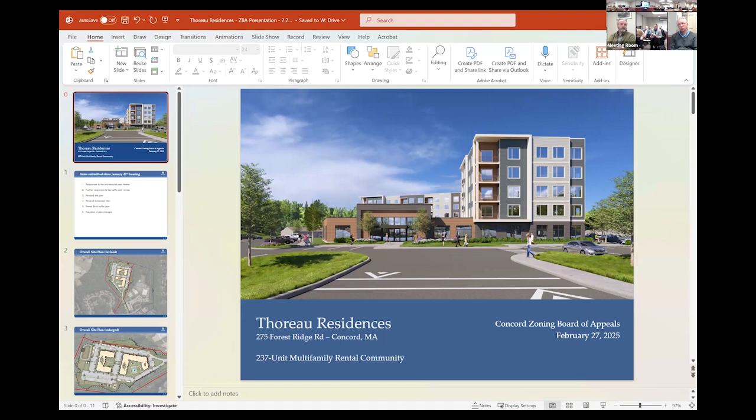All right, so what I'd like to do is start with listing out what we've submitted since the last hearing. Like you said, we were originally scheduled to be here on February 13th. We appreciate the flexibility, so apologize that we weren't able to submit everything by then. So here's what we've submitted and we'll discuss tonight. We've got a number of items.

Number one, we have a response to the architectural peer review that we have submitted in full in writing, as requested by the board. We have had numerous, I guess now 2, responses to the traffic peer review submitted. And then we saw come in today a response to the second response of the traffic peer review. I think that's largely closed out, but we can certainly discuss that.

We have a revised site plan that we're going to walk through. Going out of order, we have a narrative of the site plan changes that we'll walk through in conjunction with that site plan on the screen. And then we have a revised landscape plan that we'll go through in detail, including detailing some buffer zones that we've now included at the end of the entry drive for Sweet Birch Lane.

We have our full cast of characters here tonight: architectural, engineering, and legal, and some folks are actually on the Zoom as well.

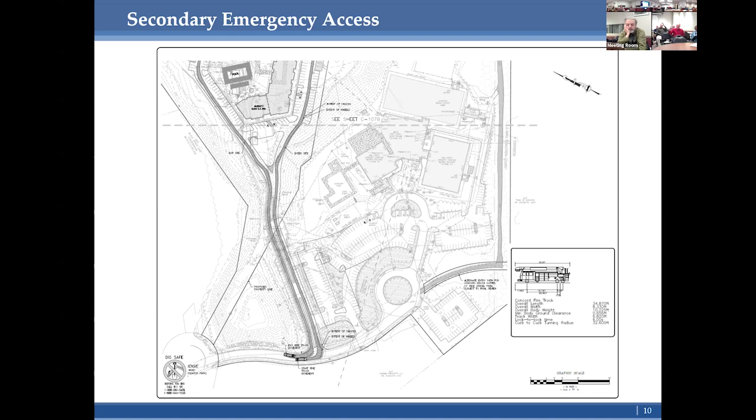Yeah, thank you. And then one more point relative to the proposed, we'll call it basketball court area, but is that going to be illuminated? Is it intended to have nighttime illumination, or have you gotten that far? We haven't gotten that far. I think that we're open to that. Is it a concern? I guess at this point, this is the first time I'm hearing it, I would characterize that as a concern.

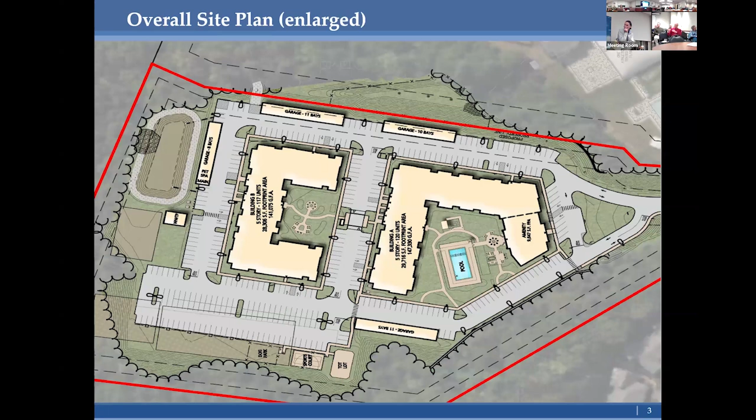And I also wonder whether that playing area might be shifted. I'm not sure of the direction here, whether it's northward. Let's go to the site plan, away from the top playing area, and move both the dog park and the playing court, for lack of a better term, just kind of shifting it in that direction. My reasoning is, yes, basketball courts or pickleball, and I know we've heard the controversy that sometimes surrounds the use of those kinds of playing facilities and the noise associated with them. It seems to me if you shifted it that way, you'd at least move it a somewhat greater distance away from the nearby residences at Black Horse Lane.

May I address that? Yeah, absolutely. Go ahead.

Point very well taken, and I want to give you some backup as to why it's here. The reason it's in this location, as I mentioned to the board, we have the underlying septic system for the treatment plant. So we've kept the sports court and the tot lot off those fields because of the embedment depths necessary for the asphalt surface, or if we embed a post for the basketball court, or any elements for the playground. The dog park is a fence, so we can work around the field. The other elements would intrude upon the wastewater leaching fields, which is why the order and position are as you see it. It's driven by the balance between respect to the abutters and the underlying infrastructure that needs to go in.

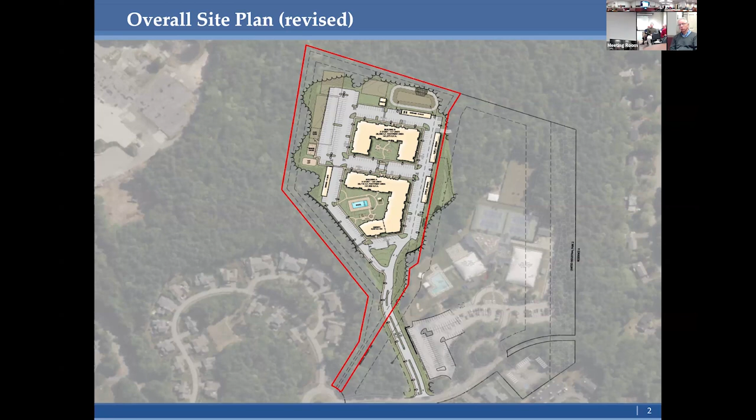Good evening, board. Tom Minor, Park Design, landscape architect. We did the landscape design for this project. I'll briefly go over the changes and revisions we've made to the landscape plan based on the site plan revisions and peer review comments.

This is slide 4, Jim. That's the two buildings, northern part of the site. I'll be repeating some of Phil's comments, but to begin with, in response to the peer review, to get more central amenity facilities, we've taken the dog park and the tot lot from this area and moved it down here, added the sport court as Phil mentioned. The tot lot is a larger expanded area for two different age groups, and the sport court will provide amenity space for older youths and adults.

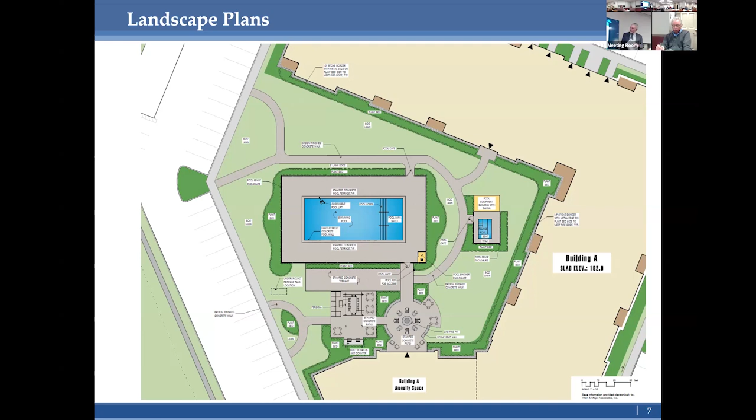This amenity area hasn't changed at all. It's more of a passive use. You have the propane tank area right here. This is our raised table crosswalk with a bus stop. This will be landscaped. We'll have some shrub masses around the building and around each seating area, fire pit, grills, seating area.

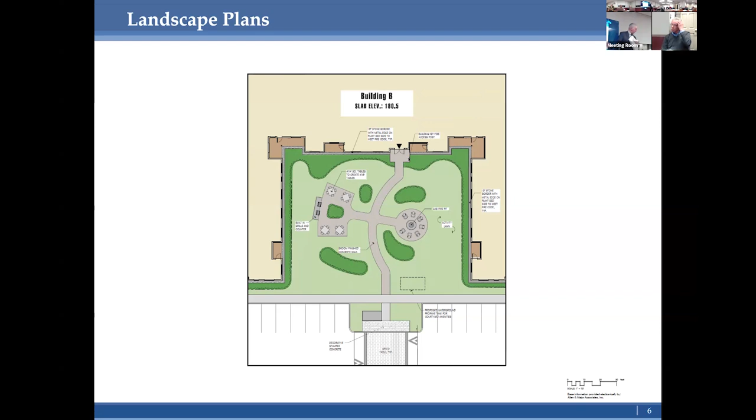And those will provide separation from the use areas and the patio. Some of these will probably move. I can see this one moving right here, actually. And this will probably switch around here as we get into the final design. If you want to go back to this, the tot lot, I forgot to.

This is the blow up of the tot lot, the sport court and the dog park. It is an ADA accessible path to connect all three, and we're not showing anything in these areas now. There'll probably be something there, but there won't be anything large to obstruct any view lines. This will be a much safer access path to the amenities than we had before up at the top of the site.

That's anything else, Jim, that I missed? I think so. Any questions?

Sure, I had this question before. I can see the path from the tot lot from the first building, but not from the second. Would a child coming across, where would they cross to get to that gray crosswalk that you're showing?

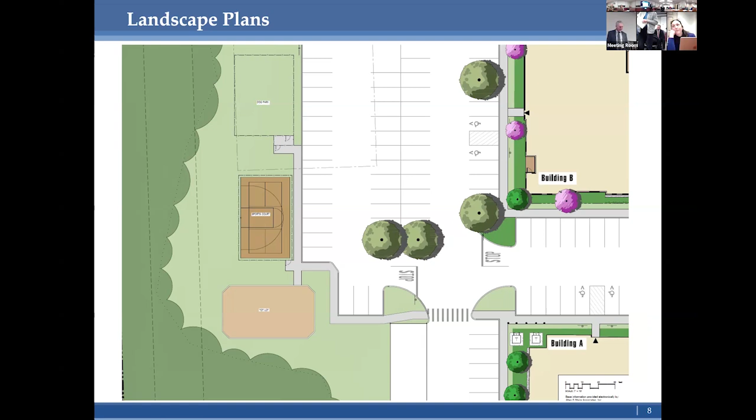Good question. May I? Yep. It's not shown on this plan, that raised speed table. So the intent is they go across the raised speed table.

Right, because the idea was to bring people through this center connectivity. So if you are coming from building B, you would come across the speed table, along the building, and then you would go along the sidewalk in front of building B to cross and then go to the amenities.

That makes sense. The idea, because we heard that feedback early on about making sure these buildings were connected through, that residents in building B felt like they were connected, not only through the passive courtyard, but the ability to connect through to get to the active courtyard. So it made sense for all of those pedestrians, including the children, to follow that same path and then branch to go to the amenities.

That makes sense. And then along those same lines, will the tot lot be fenced or not? We usually fence them. Yeah.

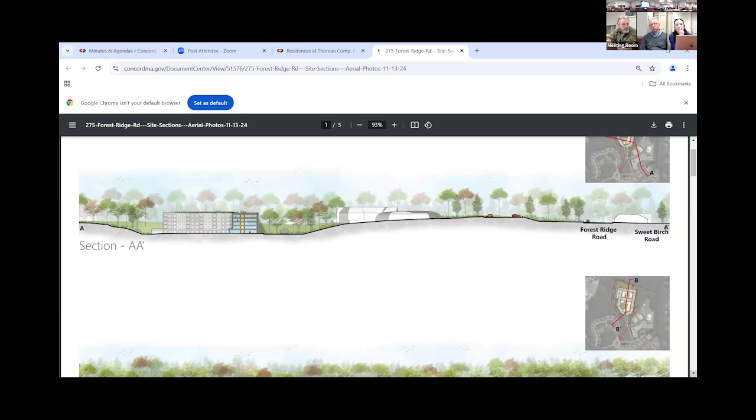Okay, so here, if you look at the screen right now, we pulled up a section, one of the sections that were done for the presentations a while ago. You can see how the building is really sitting in a hole, and even the roof, the top line of the roof, is below the roofs of Black Birch.

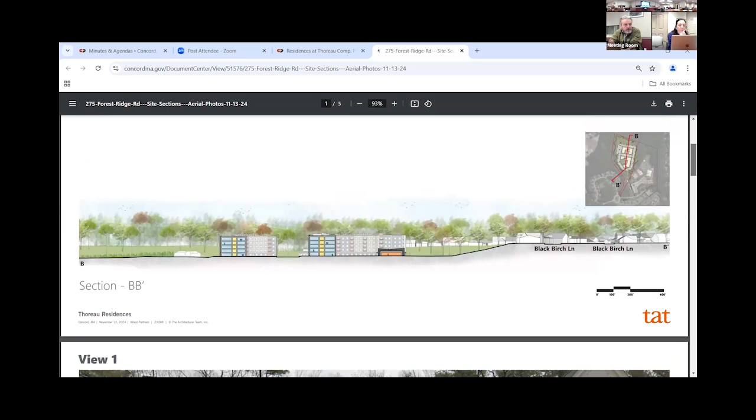So that's where we are, and the visibility should, depending on where you are... if you scroll down, you can see some photo simulations that the applicant did, looking in between homes toward the rear where the building would be. Okay, thank you, nothing I can do, but thank you.

Mr. Fluet, John Fluet, hopefully I pronounced that correctly. Thank you. Yeah, John Fluet, from 3 Sweet Birch, Cindy's neighbor. I have two questions.

One is on the trail. I know it was mentioned it was adequate to the fire department, but is that adequate with some work? Is there going to be any clearing that will have to happen in that trail system? Do we know?

I can answer that. We walked it in the wintertime. Speaking for the fire department, deferring of course to their official opinion, there's some minor understory brush that may need to be cleared to make sure it's of sufficient width. So just basic scrub brush.

We identified the possibility that there may be 2 trees right where a fire apparatus would need to take a left to go towards the development that may need to be removed. The way we left it is when conditions were drier, the fire department would bring a piece of equipment out and drive down to confirm what would need to go. So the long and short of it is possibly some light vegetation removal and maybe a tree or two.

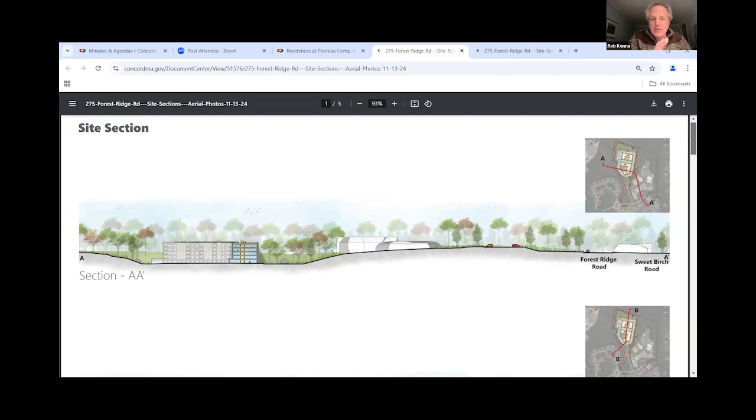The trees out my window are very thin, and primarily what you see is the trunks at the bottom of the trees. So anything that's removed below that, basically, whether the vegetation is out or not, I'll be looking through a line of tree trunks, no tree vegetation. And so the amount of removal of plants is significant.

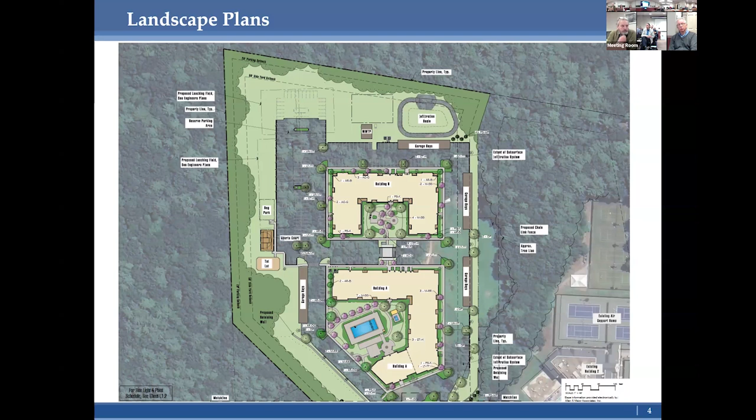Let's start with the entry drive with that piece of fence that's out there. That's the entryway blow up. I mean, I looked at it, that piece of fence is sort of hanging out there, and it's kind of odd with 4 little trees behind it. And I'm focusing here sort of on the public side.

I'm obviously not going to comment on any of the interior landscape, I believe that's you need to do that, but this is sort of the public view of it, although I will go deeper into the site shortly. That piece of fence, can we at least give it a bit more definition, like scallop the ends, turn the ends inward, so that it has a little bit more, I don't necessarily want to say purpose, but a little bit more shape, and it flows a little bit better.

Having 4 trees, an even number of trees placed in a line is always very static. You either have 3 or you have 5, but 2, like it's across the road here, or these 4, is very static. So I would at the very least increase that by another one.

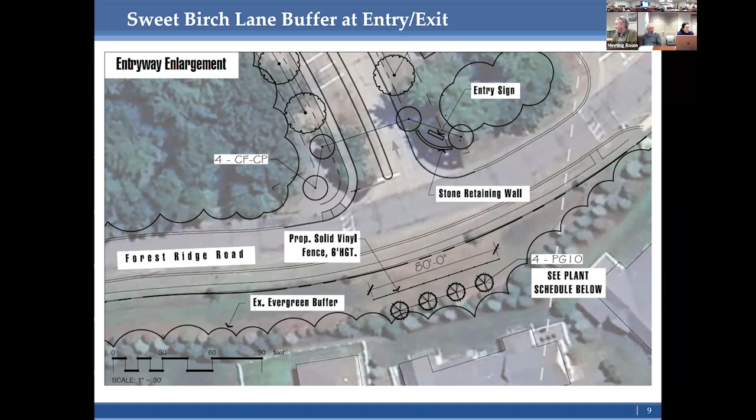Did anybody want to make that motion? I'd love to make a motion that we continue this hearing for Thoreau Residences for comprehensive permit under MGL Chapter 40B for a 237 unit multifamily development until March 13th at 7:30 PM. Second. All those in favor? Aye. Aye.

Thanks so much for doing this. We brought this project forward a little bit again, so we keep on pushing it forward, so we'll get there. I think this was when I was on Zoom and I didn't have the same visuals.